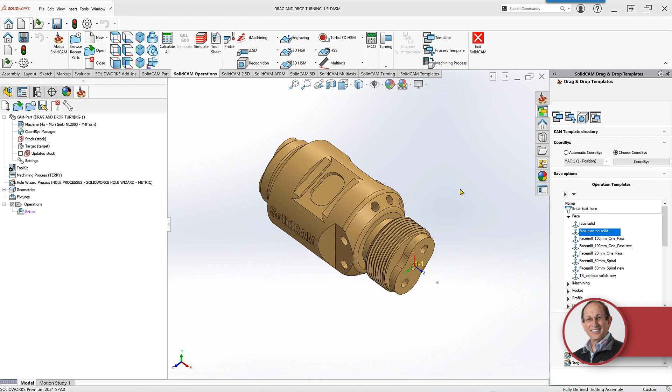We have now added the option of drag and drop templates in turning when dropping it to a solid turning part. For example, say I want to put a face turn on this face over here. All I have to do is take that particular template that I created and drop it to that face. And we have the operation done.

Taking a quick look at the simulation itself, you can see that that operation is done exactly the way I had it planned in my template. If I want to do, say, a turning on the outside, say from this face over here to this face over here, now we need to touch two faces, the start and the finish. So if I go to my template that I created for it, in this particular case, I have one here called outside turn on solid with finish.

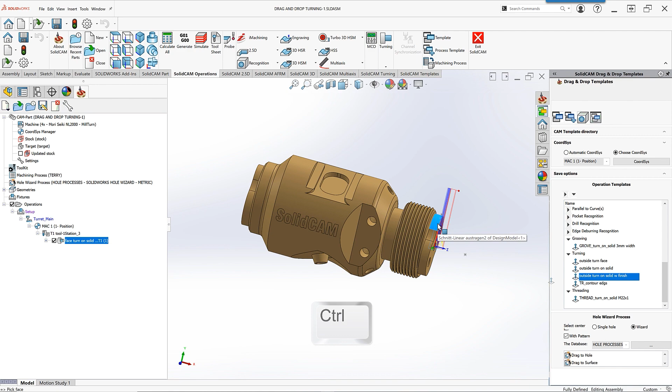So as I drag to the first surface, before I let go, I hold my control button. Now I'll let go while holding my control button and then click on the second surface. Now I let go of my control and we have our toolpath created. Again, looking at our simulation, you can see it does exactly what I wanted. Working on the outside, including the finish cut.

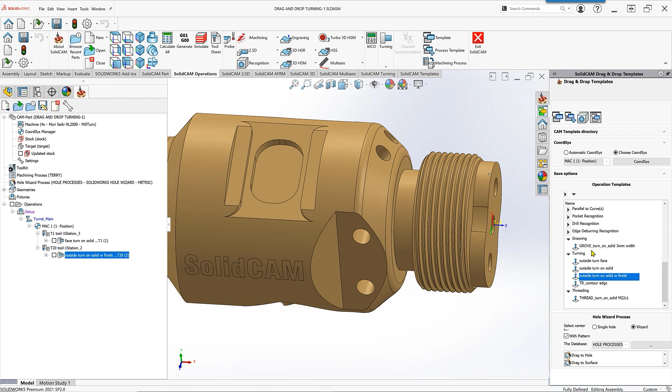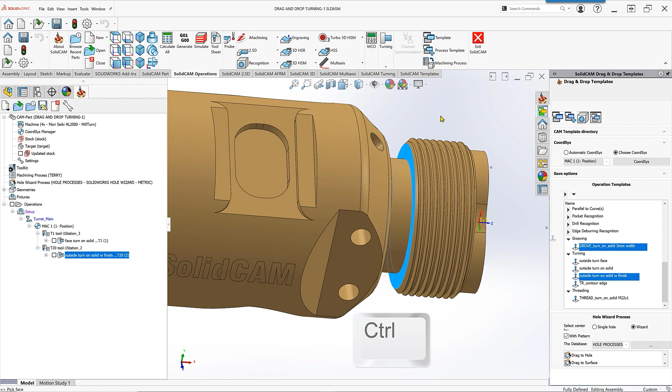Now let's take this one step further. I'd like to work on this particular groove over here. So for that, I have a groove turn on solid. Now, it helps in this particular case if you have a 3Dconnexion, making it easier to get to the surfaces you need. I'm going to drag that particular template to that surface, holding my control. Now turning the part and clicking on the second surface over here. When I let go now, we have that operation created for that area over there as well.

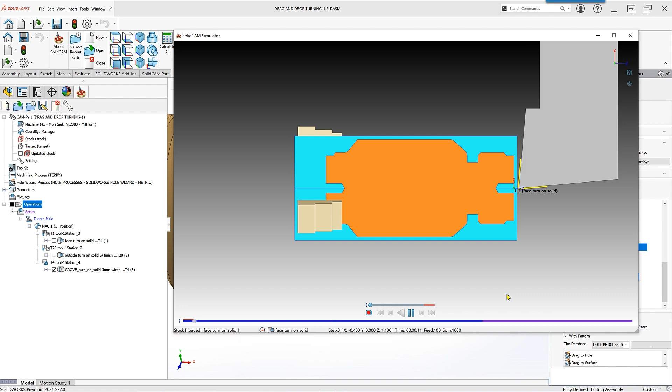Let's take a look at the simulation on the entire part. We have our face, our outside turning, including the finish cut, and we also have our groove.

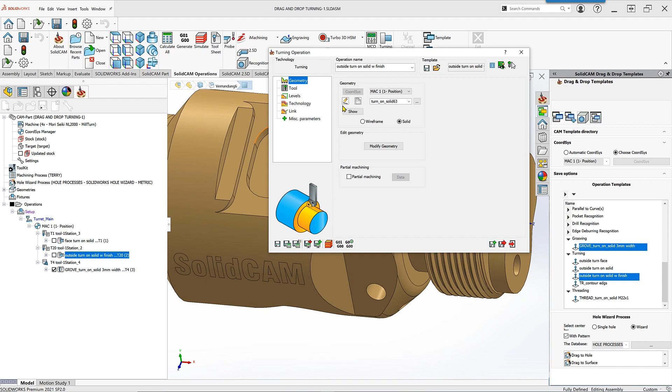Now, one more note should be noted when creating a template of this sort. Let me open up the outside turn, for example, and you'll note that when creating a geometry, and I'll go into edit, we always have the selection direction. When saving your template, be sure to check the include geometry direction. If you do not do this, when you do the drag and drop, it'll ask you then which direction you want to go in.